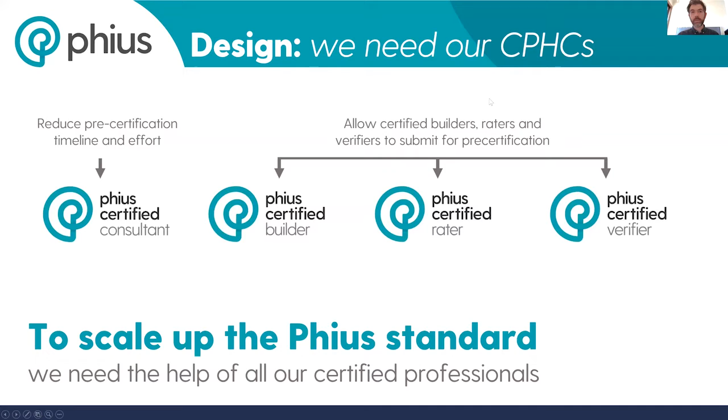Talking a little bit more about reducing that barrier to entry, we want to create that accessibility for more CPHCs, certified passive house consultants, like I said. What we're seeing around the country right now is a lot of people outsource their energy modeling. If you've gone through the CPHC course, you've learned WUFI, which is our primary energy modeling software. But you've learned that in about 2 days, it's about 8 hours of content, and you're going through it for a specific project really rapidly, all while preparing for the final exam.

So the result is many people don't retain all the skills they need in WUFI, requiring you to either get back into it and invest personal time to learn that piece of software after your CPHC, or what we're seeing is you outsource it. So we lean on those couple people who are doing a lot of energy modeling, and we lean on them as experts. But again, that creates a bottleneck because we have X amount of CPHCs, and only a small proportion of those CPHCs actually know how to use WUFI effectively.

However, I'm assuming here that every CPHC has the ability to fill out a spreadsheet. So if we look back to LEED, when LEED was first introduced, that kind of spreadsheet-based certification system was very accessible for many, many people. And that's what we're trying to recreate here for the prescriptive path.

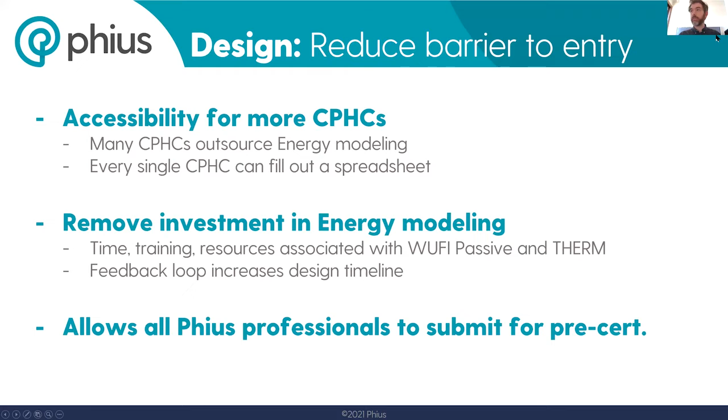We have to make a design decision, test it in the energy model, go back, change our design based on the feedback of the energy model, and we kind of go back and forth, rather than the prescriptive path, which just tells us what to do from the very beginning. So we check that box and we move on. So there is a different level of investment and timeline, and it also allows more Phius professionals to submit for pre-certification.

We want to scale up volume very rapidly as far as passive house certification goes. So the prescriptive path is limited to single-family homes. However, it does support the rapid development of single-family homes.

We've seen this climate-specific standard be very successful in the US over the past 10 years. So we're able to essentially say, for each climate zone we're looking at, what is an appropriate R-value for the walls, what is an appropriate U-value for the windows, taking conservative guidelines from all of the data we've collected.

It's also a very cost-effective way to scale up large community development. In the past, if you wanted to build 10 identical homes on one subdivided tract of land, you would still need 10 energy models because we're getting so specific about orientation, shading elements, etc. The prescriptive path starts to abstract this enough that you can have one prescriptive checklist for just that one home typology. As long as those buildings are the same that you're developing, you can use that same prescriptive checklist over and over again.

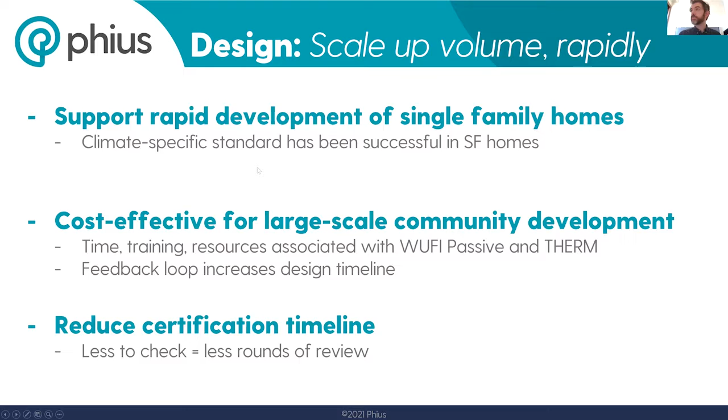So again, I don't want to beat this over your head too much, but we have an expedited certification process here, which is really significant. Speaking as a CPHC, I have worked on about a dozen prescriptive path projects at this point, and comparing the timeline and the amount of investment of my time towards the prescriptive path versus the performance path is really, really significant.

So what we're looking at here is a sample project, kept unnamed for a reason, but what we can see is that there's a period of time right here where the architect and the energy modeler have to go back and forth, back and forth, back and forth, coming up with a design, testing it, maybe a feasibility study or multiple rounds of revision in order to really hone in our specific design. So what the energy model does is allow us to make small adjustments on a very fine scale, and as a result we get this back and forth that's very extensive.

Then we go into a back and forth with Phius. We submit our project to Phius for certification. They review it, send back comments, we make changes, send revisions, and we go back and forth, sometimes up to 3, 4, 5 rounds of review. Each of those rounds has 6 to 8 weeks of turnaround time associated with it. So both the internal back and forth and the certification back and forth take a long time.

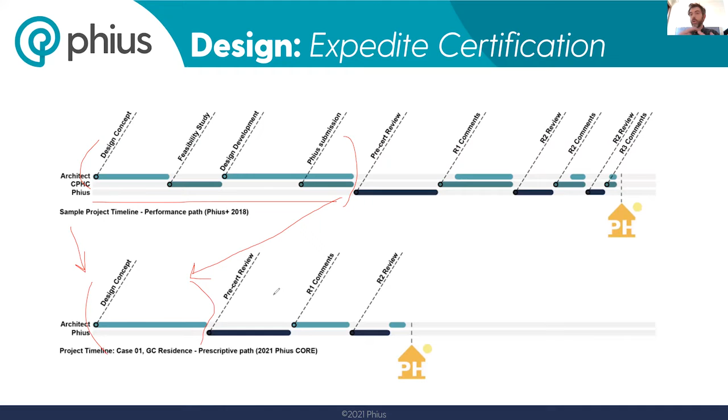Now, when we move down to the prescriptive path, there's 2 things going on. One, we remove that back and forth between the energy model and the design because the targets are clearly identified from the very beginning. So you just look at your prescriptive checklist and say, this is what I need to check off, and then you design for that. We solidify this whole period into a much shorter time because we don't have to go back and forth and create our energy model. Just to get you a quick picture of what exactly you'll be looking at.

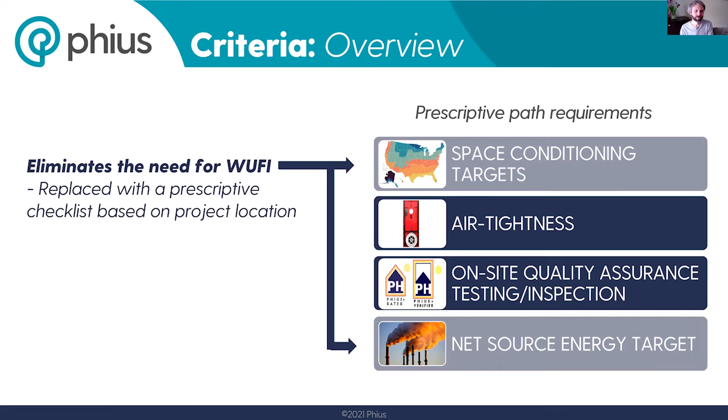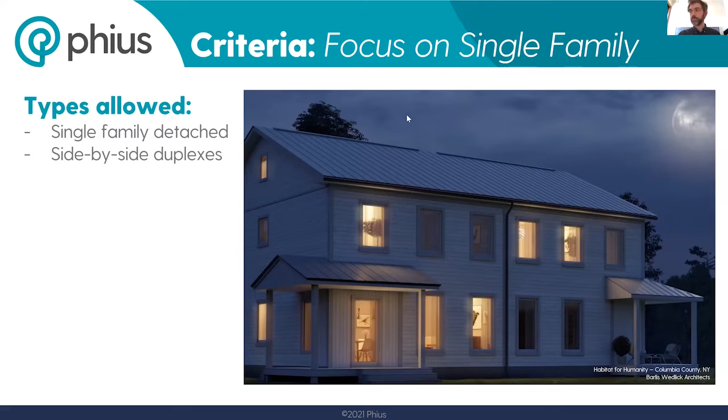There are some other things we need to be aware of as far as this criteria. For the first time potentially ever, there's much more of a focus on the form factor, or compactness, of our building. The reason this is finally coming into our focus is because our energy models just do this for us. Our WUFI model, which we use for Phius certification, just takes the form factor into account in its calculation, but it never makes it very obvious and says, hey, you want a more efficient building, maybe simplify the envelope, maybe reduce some of these bump outs or bump ins a little bit. Even our PHPP, which was used historically for passive house verification, through the calculations embedded within both of these types of energy models, we're looking at compactness.

Now, with the prescriptive path, since we don't have this energy model, we need to be a little more aware of compactness on our own. We're going to see this in an example in a few slides. We're essentially limited to a certain amount of building envelope area, based on our square footage of interior area. The other thing is we're trying to control the occupant density of these buildings as well. We see problems when we get into this McMansion typology, very little amount of people in a very big building. That really takes us outside of the data pool we're comfortable with, and would get us into more of a performance path. 900 square feet, essentially the ICFA per bedroom, or ICFA per person, that's still a lot of space.

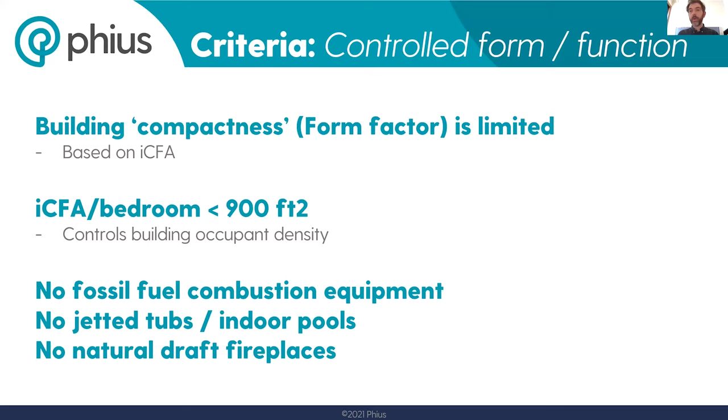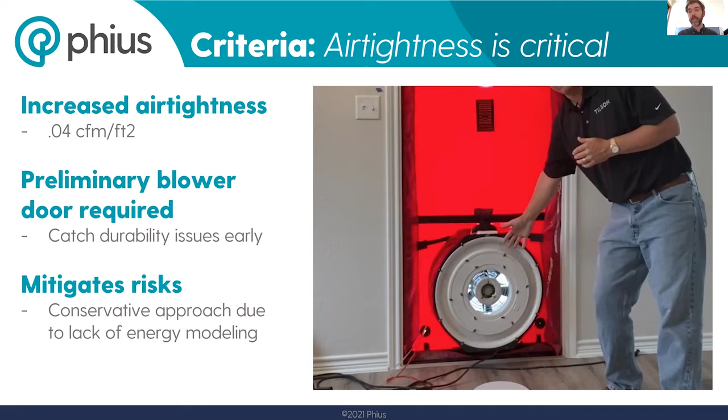Relative to that durability question, the calculator or checklist we're using has a built-in assembly and window moisture risk compliance. This is something we see overlooked constantly when people are certifying projects. There's a breakout window moisture risk calculator that very few CPHCs know about, and there's also moisture control guidelines for building assemblies buried deep in the certification guidebook that people often don't know exist. So we wanted to simplify this process. Instead of asking our CPHCs to deal with an energy model and also know where all these breadcrumbs of information are, we're pulling it all into the checklist, and the checklist automatically verifies that we're hitting these moisture risk compliance items.

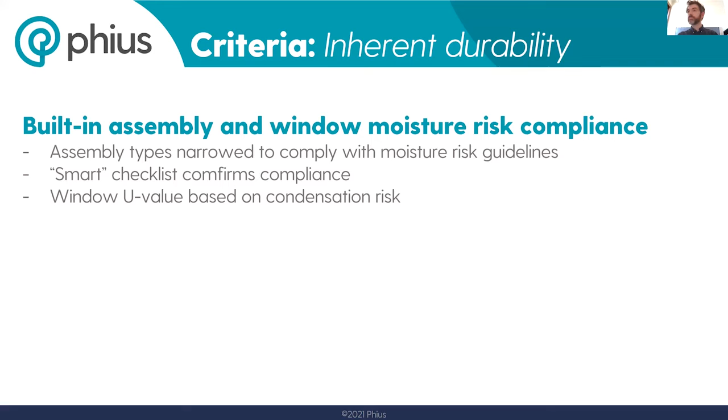Also with QAQC, our quality assurance, quality control, we have the high performance staircase, which gives us a view of Phius alongside all of its co-requisites. Our Phius raters and verifiers are still extremely important for the prescriptive path. They verify that we're meeting all of our compliance for building energy code, Energy Star, Zero Energy Ready Homes, EPA Indoor Air Plus, EPA WaterSense criteria, and obviously our Phius criteria on top of that.

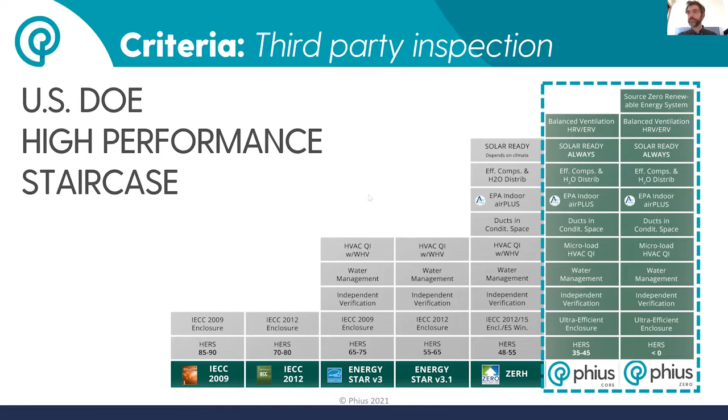So the past 45 minutes, we've really looked at what are the intentions behind the prescriptive path. Now let's look at just getting into it—how do you actually go and do that? Again, this is relevant to people working on multifamily or even non-residential projects as well, in that it gives you a starting point. It just lists out all of the things that our project needs to verify.

So what we're seeing here is what we're calling the core prescriptive snapshot. You can find this at phius.org. Essentially what we do is put in our state up here at the top—everything in orange is what we're going to be changing. Our locality within the state automatically tells us what climate zone we're in.

Then from there, we put in the size of our building in iCFA, or floor area, number of bedrooms, and number of stories. That spits out for us our iCFA over bedrooms, that occupant density we referred to. You can see here our limit is 900 square feet per person. This particular example calculates out to 375 square feet per person, so we're well within the limits there.

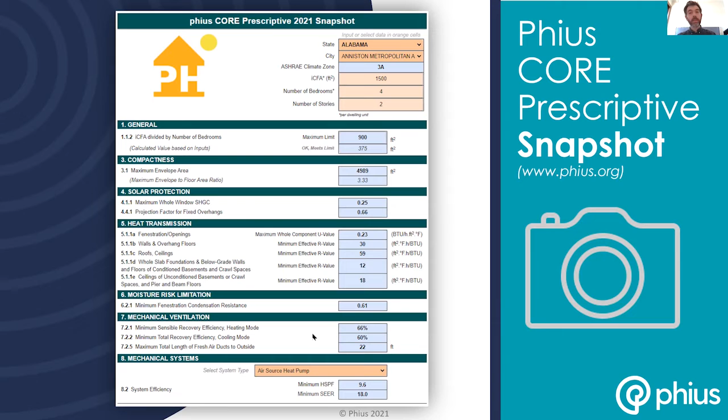It'll also give us solar heat gain coefficients, projection factors for fixed overhangs, if we're in a climate that needs to modify overhangs and solar heat gain coefficients. It gives us required U-values, R-values, etc., as well as some mechanical requirements. So it's just really laying out all of the prescriptive checklist items for us at a very early stage, perhaps without even knowing what our building looks like at this point.

We would take that snapshot and we can go right into design from here. So you work with the architect, design your building. We would then formalize that design into the checklist, which goes into a lot more detail. From that checklist, we should be able to receive pre-certification through Phius. We can then go build the project, and through construction, paired with the rating from our Phius rater, we can receive final certification.

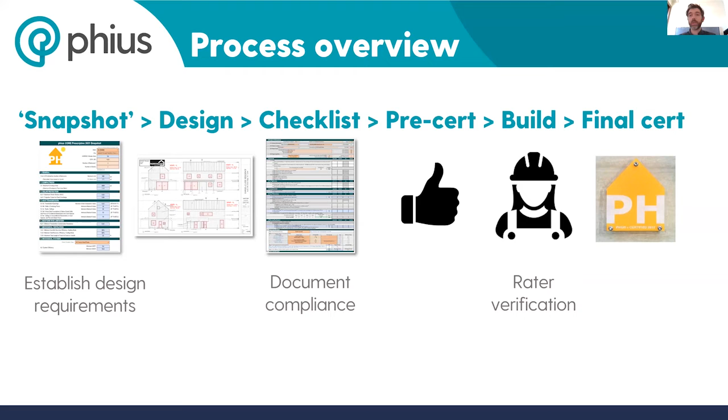Hopefully this is just review for most of you, but we can see that the path to certification from that snapshot to final certification is very similar to what we're doing in the performance path. We would submit that prescriptive checklist—that's going to be the verification from the CPHC that everything is being satisfied. We will submit our construction drawings as well as takeoff drawings, and then we will submit our data sheets. So again, very similar—the prescriptive checklist is replacing our energy model in this prescriptive model here.

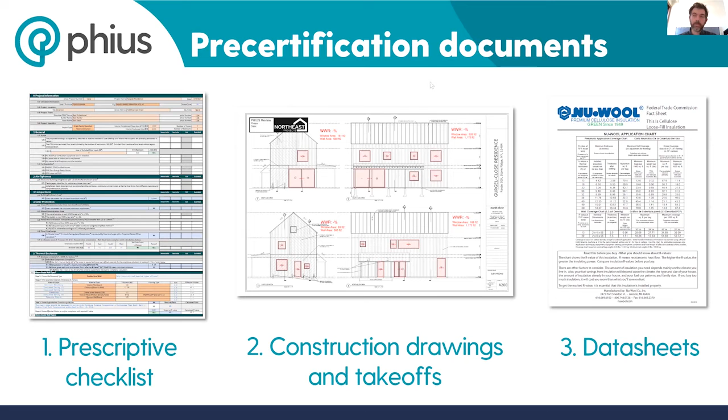Zooming into that prescriptive checklist, we can see it's organized into 9 sections. So we go from general information, air tightness, compactness, solar protection, thermal enclosure, and then into mechanical systems below this. This gives you an example—for instance, our general tab up here, we have to verify all of our co-requisite programs are satisfied. We would have to verify no jetted tubs or pools, no natural draft fireplaces, etc. We would verify that our target is 0.04 CFM per square foot, verify that we know there's a preliminary blower door test required, and we just go down the checklist just like that.

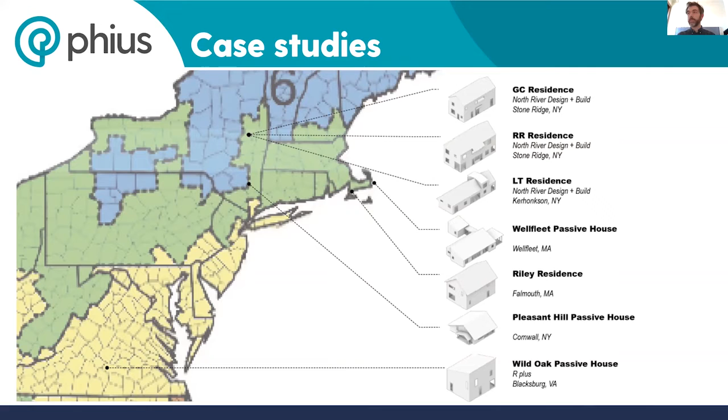We can see they ran into a couple different snags. The Wellfleet project could not satisfy the compactness criteria, so it had too much exterior envelope relative to the amount of interior floor area. The Riley residence, for design reasons, could not meet the requirements of the thermal enclosure. The Pleasant Hill project also could not meet compactness, since it had a lot of lofted spaces inside.

And then interesting, that final project, the Wild Oak Passive House in Blacksburg, Virginia, actually met all of the prescriptive requirements, but decided that they really wanted to see what that energy model looked like, because Phius ZERO certification was really important to them. So they chose the performance path instead of the prescriptive path.

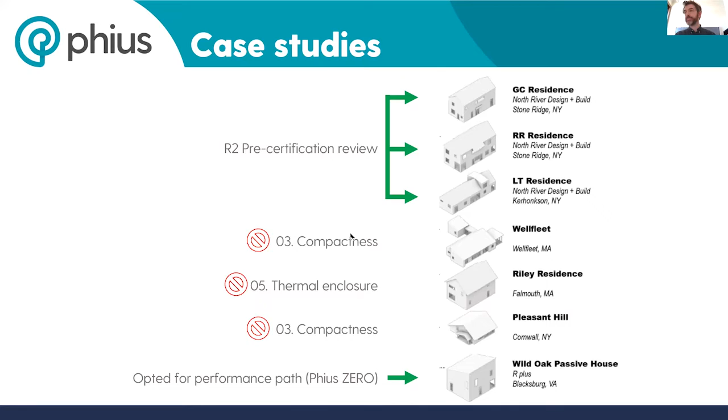So I'm just going to go through each of these principles kind of quickly. We're getting close to the end of the hour here. Air tightness, as we discussed, is really important. I'll skip over that, but the key difference is we're increasing that air tightness, going from 0.06 to 0.04, to take a more conservative approach.

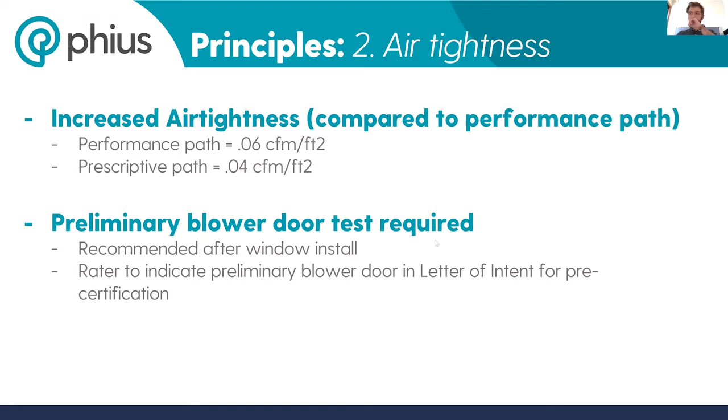Compactness is also really important. That's a ratio of the floor area of the building to the square footage of the exterior envelope. Phius uses a notional compact building as their target here, assuming 12 feet per story, a width-to-depth aspect ratio of about 3, and evenly distributed floor area per level, so it's assuming a very rectangular, boxy building form.

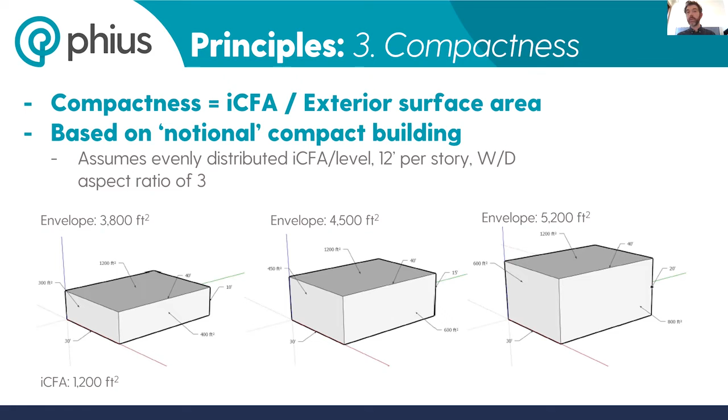We can see here on the bottom the relationship between height of floor and overall building envelope. These are 3 examples with the same square footage of floor area inside the building, but as we increase the height of the floor, we can see the envelope grows and grows. So same livable area in each of these 3 examples, but the project with the double-height space has a much larger area of envelope, which can create problems for the prescriptive checklist.

So this is that example in Wellfleet, Massachusetts. It was already under construction when the prescriptive path came out, so we tried to retroactively apply it. Unfortunately, it didn't work. We can see a lot of building complexity here, with some double-height lofted spaces. The result was a total area of envelope above the cutoff point outlined in the prescriptive checklist.

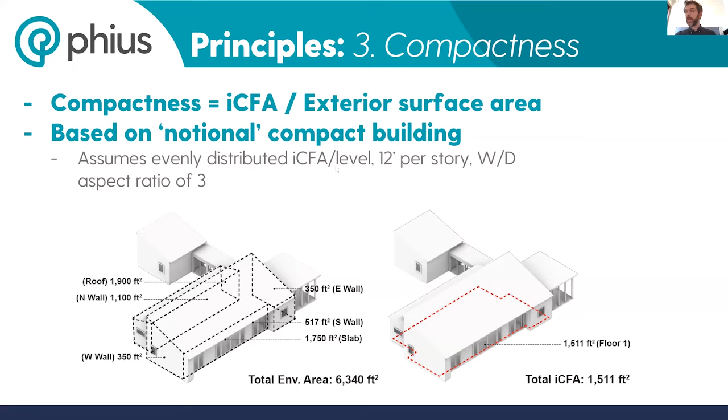For solar protection, the climate zone you're designing for is super important. Climate zones 5 through 7, you get out easy—the only thing we're verifying is that you have a net gain score, essentially taking area takeoffs of the windows and verifying you're not overglazed on a single building elevation. Climate zone 4 you get to deal with all of the solar protection elements: a max solar heat gain coefficient for climate zone 4 and below, plus that net gain score.

When you get into climate zones 0 through 3, we're getting into more cooling-dominated climates, and we need to deal with fixed overhangs as well. So depending on where you are on our ASHRAE climate zone maps, we have to deal with solar protection in different ways. Again, the prescriptive checklist will tell you in a very clear way exactly what you need to do for your particular climate.

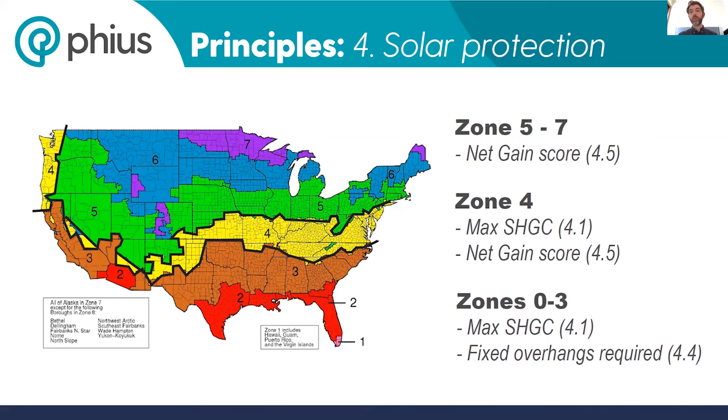Principle 5 would be our thermal enclosure. We have a section in the prescriptive checklist where we select our assembly types. This is looking at just our typical walls, and we can see here we have many different wall types to choose from.

Double stud wall assemblies are allowed, except only interior load-bearing double stud assemblies for some hygrothermal reasons that maybe you guys can email me about after this presentation.

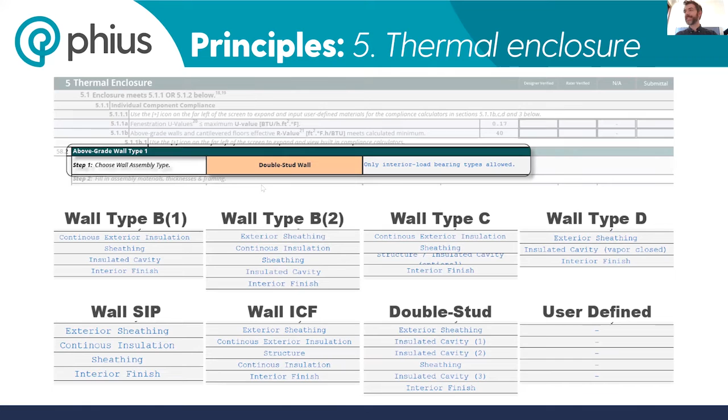We can actually put the thermal resistance values of all our different insulation into the checklist, and it's really nice because it just tells you if you're in compliance with the Phius certification or not. So we have a required R-value here of R36, based on the climate that we entered. We can see the calculated R-value for our particular assembly, and then whether we meet both that required R-value as well as the moisture control guidelines. It doesn't allow us to even make the mistake of overlooking our moisture control guidelines.

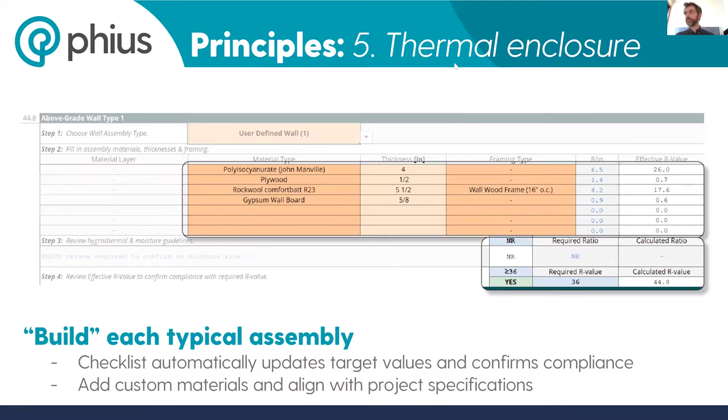Included within that is obviously our thermal bridging and reduction of thermal bridging. We have to very clearly define what is continuous insulation, and that's also included in this checklist. Generally, you want to maintain at least R10 continuously around the envelope of the building. Continuous insulation is defined as insulation that's uncompressed and continuous across all structural members, without thermal bridges other than fasteners and service openings. So we are accounting for some thermal bridging.

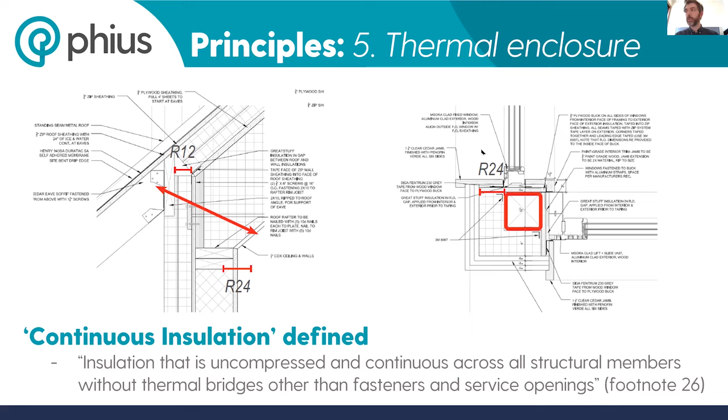I apologize, guys, we're running out of time, so I'll go through this a bit quicker. We have U-value requirements, again depending on climate—pretty self-explanatory. That's dealing essentially with your worst window. Your worst window in your project has to satisfy this U-value requirement, and as long as it does, everything else in the project is fine.

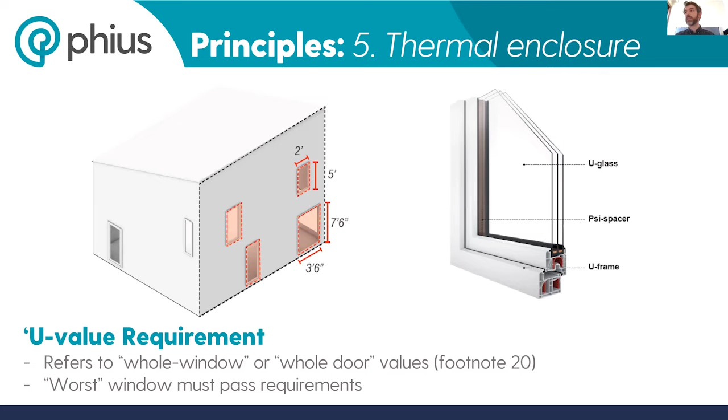Moisture risk limitation, both for windows and walls, is automatically verified. In the following couple slides I'll sum it up: we have that checklist for mechanical ventilation, mechanical systems, lighting, miscellaneous electrical loads, and domestic hot water—a series of criteria that we have to meet.

Okay, we've got about 2 more minutes here. I just want to give you guys some resources. We have the certification guidebook, which can be found at phius.org. This also gives you step-by-step instructions for the prescriptive path.

We do have a number of professional trainings coming up: the CPHC, Certified Builder, Rater, and Verifier trainings. You can find specific dates at phius.org. If you're still interested in the Performance Path, we have a number of WUFI trainings, brand new this year—a beginners course, which is a 10-hour total course spread over 3 days, an advanced single family course, and a brand new advanced multifamily course. Single family is happening the very beginning of March, and multifamily is coming in April.

We're also really excited to announce more formal training for the prescriptive path. The dates are escaping me right now, but it's a 4-hour workshop, 1 day online, intended to be about half of your workday, where we go over a presentation similar to this looking at the prescriptive path, but then we actually dive into a sample project and together fill out that prescriptive path in depth, giving us an additional 3 hours to get into the weeds.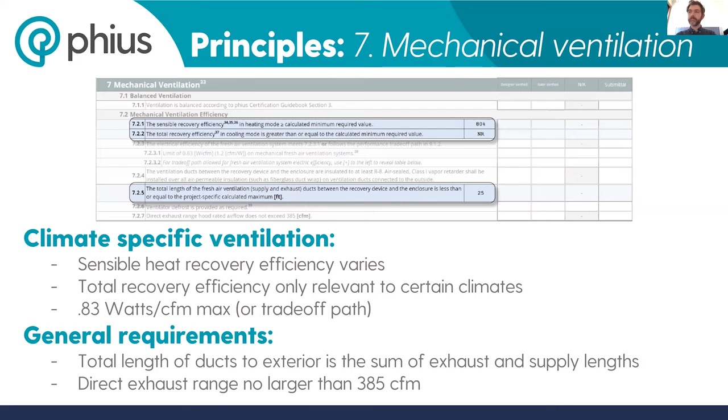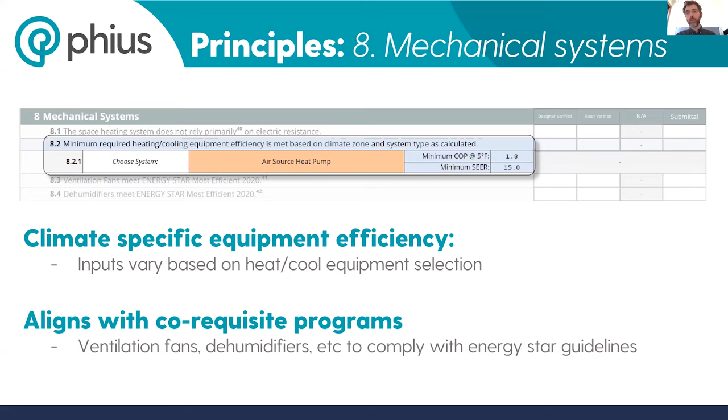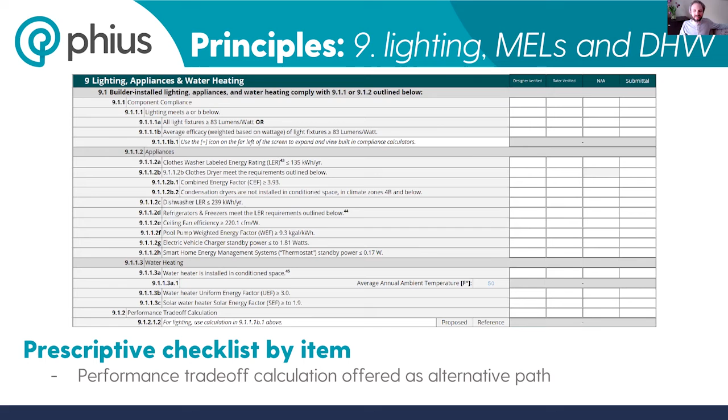So the higher level question is regarding recovery systems that have heat pumps built into them, and this may be a question not just for prescriptive but for performance too. Are those allowed? Do they have any special considerations?

Yes, depending on the manufacturer. There are certain devices that have received the ratings we need to verify that the numbers they're giving us are feasible - that's essentially what it comes down to. Theoretically, as long as you meet these different ventilation efficiencies, watts per CFM for ventilation, etc., that should not prevent you from using any certain types of equipment, whether it's a combined ventilation, heating, and cooling system, or two separate systems like we traditionally see. So yes, these can all still meet requirements.

I have seen a lot of questions about these in-wall kind of ventilation devices, without getting into specific manufacturers. Now, those are also theoretically allowed, but you have to be very careful about the CFMs they're capable of delivering. You still have to meet minimum CFM rates for bathrooms, kitchens, etc.